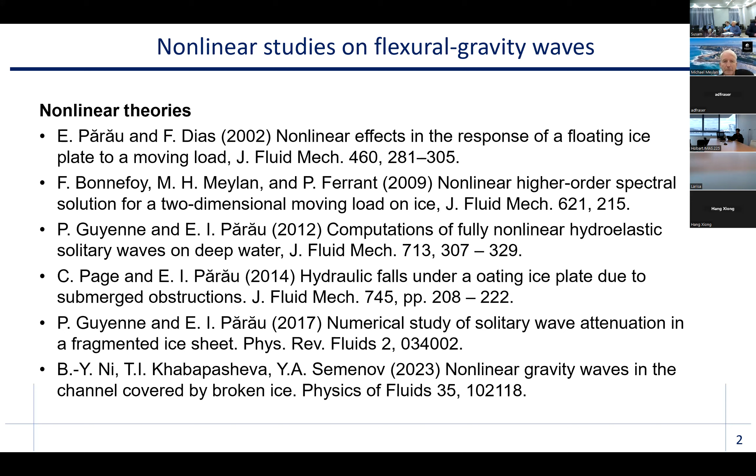The Bernoulli equation is written on the interface. Here, P ice is the pressure on the interface from the liquid, and it is equal to the pressure providing the balance of the elastic sheet. It will be shown later that there is a flow regime for which two waves of different wavelengths may exist. These waves may extend to infinity, but for computational purposes we need a uniform flow at infinity.

This can be provided by adding the damping term in the dynamic boundary condition. The coefficient CD equals 0 in the calculation region of interest, and it is not 0 in the damping region.

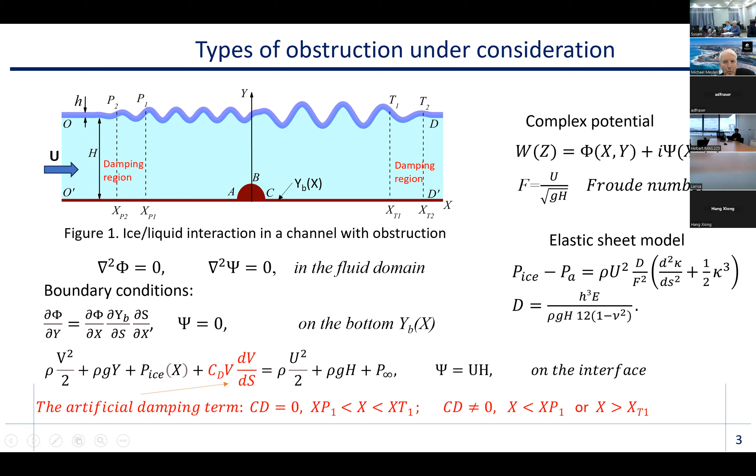We use the hodograph method to determine the complex potential of the flow. Determination of the complex potential W of Z is a difficult problem. Therefore, Joukovskii and Michell proposed to introduce an auxiliary parameter plane, or zeta plane. Then they proposed to search for two functions, complex potential and complex velocity, both as functions of the parameter variable zeta. If these functions are found, then by integration of their combination we can obtain the mapping function which relates the physical plane and the parameter plane.

In the present case, for the channel flow, the complex potential plane is quite simple. This is just a strip, and we can immediately find the conformal mapping of the first quadrant onto the strip. This is just the logarithm function, and its derivative can easily be found.

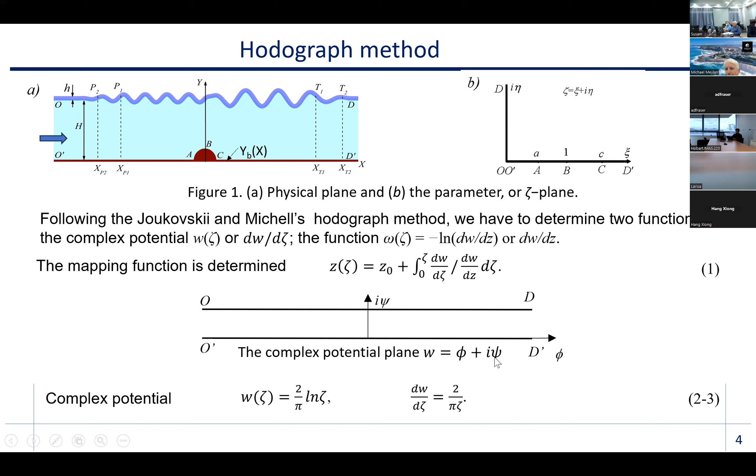To find the function of complex velocity is a more sophisticated problem. At this stage, we assume that we know the slope of the bottom, and we know the velocity magnitude on the interface. It means we know the velocity magnitude on the imaginary axis of the first quadrant and the slope argument of the complex velocity on the real axis of the first quadrant.

Then we apply an integral formula which solves this mixed boundary value problem. This formula immediately provides a complex function which satisfies the boundary conditions 4 and 5. What we need is to consider that the slope has corner points A and C, and we have to evaluate the integral at these points, and finally we can obtain the expression for the complex velocity in this form.

Then, as I mentioned, the combination of these two functions can provide the mapping function. However, this function has a logarithmic singularity. It means that if we use this formula, we have difficulties computing parameters in the channel far from the origin, at distances larger than 5 depths of the channel.

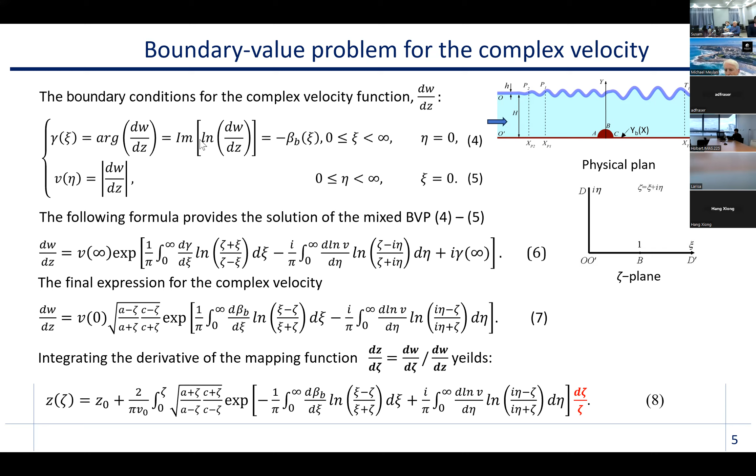To overcome this logarithmic singularity, we again come back to express the parameter variable zeta through the complex potential. And substituting this expression into the expression for the complex velocity, we obtain the complex velocity as a function of the complex potential. And finally, we obtain the derivative of the mapping function in the form 11.

So it looks like the Kirchhoff-Helmholtz solution, where they obtain the function dz also as a function of the complex potential. We can see this function has two unknown functions at this moment: the slope of the bottom as a function of the potential, and the velocity magnitude on the interface, also as a function of the potential.

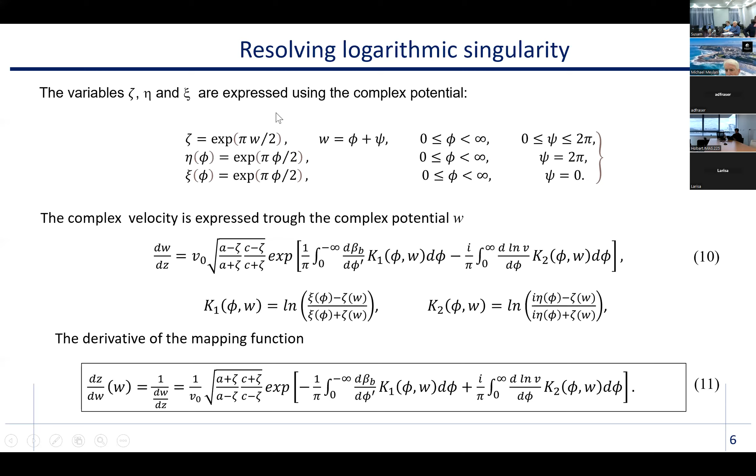So to determine these two functions, first we have to consider the shape of the bottom given by the slope beta of s, which is a known function, and using the derivative of the mapping function, we can find the function, where s is the spatial arc length coordinate along the bottom. So this leads to the integro-differential equation shown here. The function d beta d phi appears on both sides, and this equation can easily be solved using the method of successive approximation.

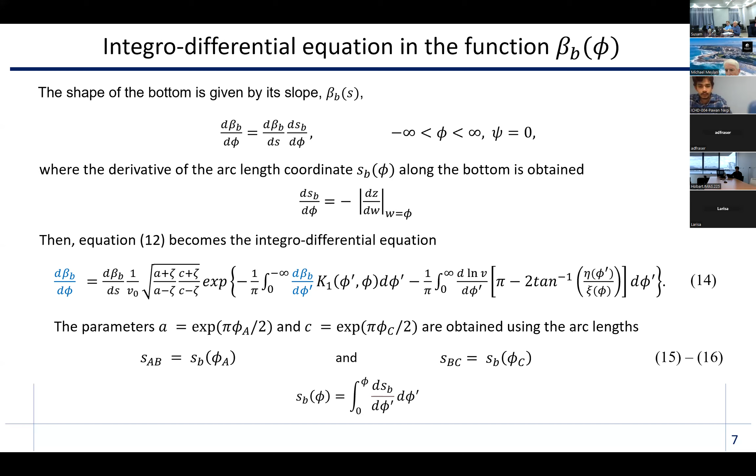Also, we have two equations to determine the position of points A and C. They can be found using again this function of s. To determine the function of the velocity magnitude on the interface is a difficult problem. If we proceed with analytical derivation, we arrive at a hypersingular integral equation, whose numerical solution is quite difficult. So we go another way.

We approximate the interface by a spline of order 5, which provides linear interpolation of the pressure between two nodes on the interface. So using the dynamic boundary condition, we reduce the problem to a system of nonlinear equations in the nodes of the spline interpolation.

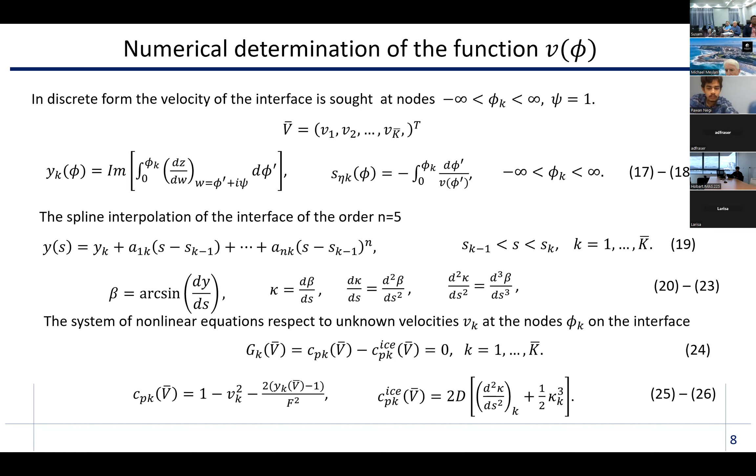Speaking is open. And you can continue. Okay.

In the second region there are two wave numbers in this equation, and we have two waves. The first root is closer to the case without the ice sheet, and we call the wave corresponding to this root the gravity wave. The second root is due to the elastic sheet, and we call it the elastic wave. And in the case of supercritical flow in the channel, this equation has one root, which is caused by the elastic sheet.

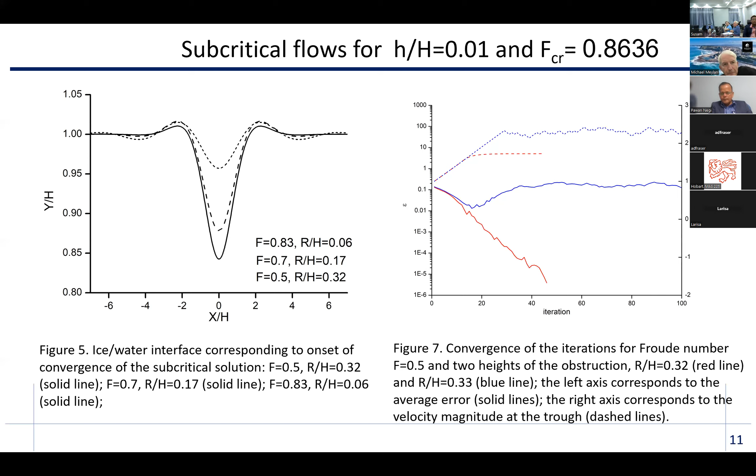Here two heights of obstruction: the red line 0.32 and the blue line 0.33, this is again maximum height of obstruction. The blue line corresponds to the maximum height of obstruction. The limitation now comes from the situation that the local Froude number at the trough of the wave, shown by the dashed line, becomes larger than the critical value 1. So at the trough, flow became supercritical, channel super. This is a limit, giving a limitation to get a convergent solution.

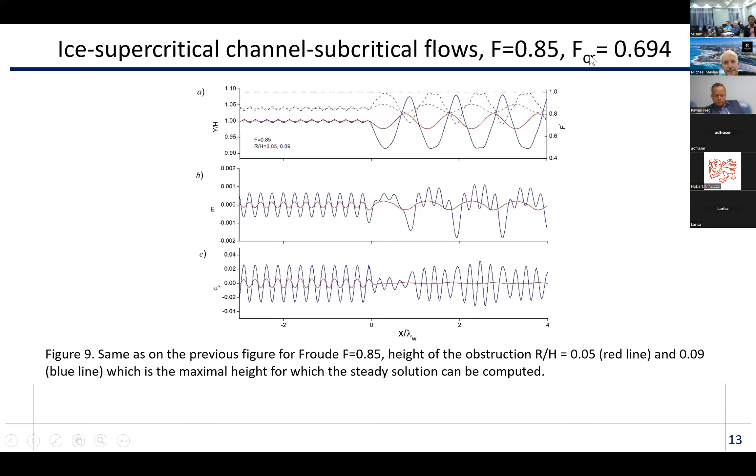Finally, when the Froude number approaches the critical Froude number, the wavelengths of the elastic sheet and gravity wave approach one another, and we have superposition of two waves of closely matching wavelength. This is well known from the theory of oscillation. It causes quite complicated behavior of the oscillation. Also, we can see that the elastic wave decays downstream of the obstacle, but decays more slowly as we approach the critical value.

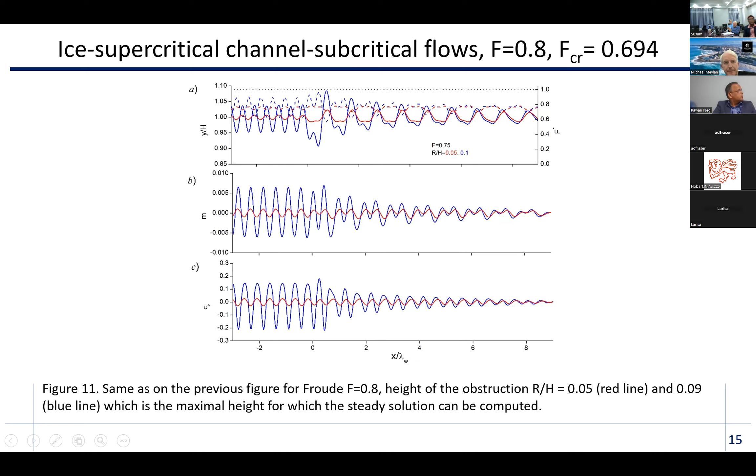So in this case, on the interface some local waves appear, which make it difficult to obtain a convergent solution. According to the dispersion relation, we should see some waves due to the elastic sheet here, but the amplitude is so small it's almost invisible. We can also see these waves in the behavior of the bending moment and pressure coefficient on the interface. As the Froude number increases, the amplitude of oscillation decreases.

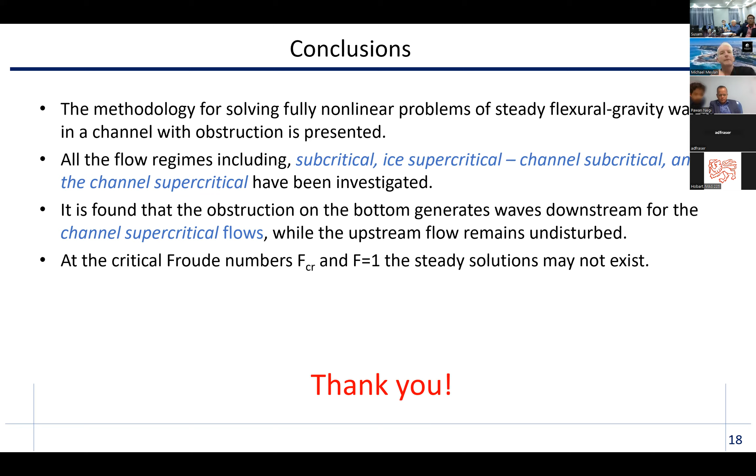So, do we have any questions for Yuriy? Someone will ask. And Pete, please feel free again to write your questions in the chat. I've got some questions myself, but I'm just hoping someone else gets a chance to ask.

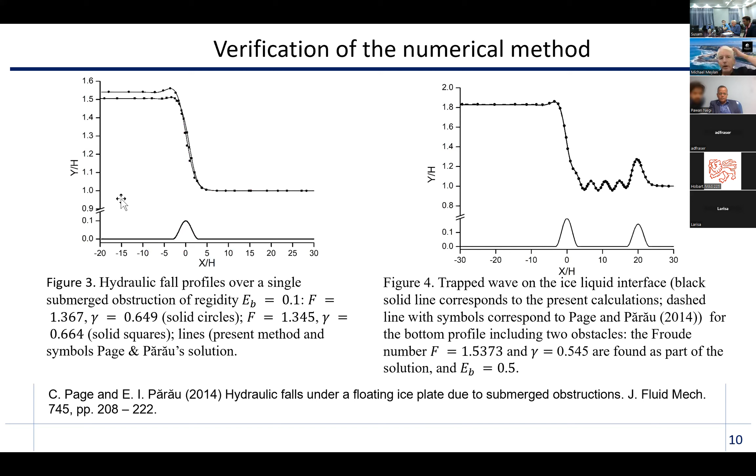Yuriy, what's the main challenge compared to the case without the ice? When this method was developed for the case with just a normal free surface, how does the ice make this more challenging? Maybe I'll write the question in the chat.

Yes, yes, it's completely true. In comparison with broken ice, we have higher order derivatives which appear in the dynamic boundary conditions, and it makes additional computational difficulties. So in case of broken ice, we have a third order derivative. In case of the continuous ice sheet, we have a fifth order derivative. And as the order is higher, for computation we need more nodes to interpolate correctly and precisely the interface. That is the main challenge.

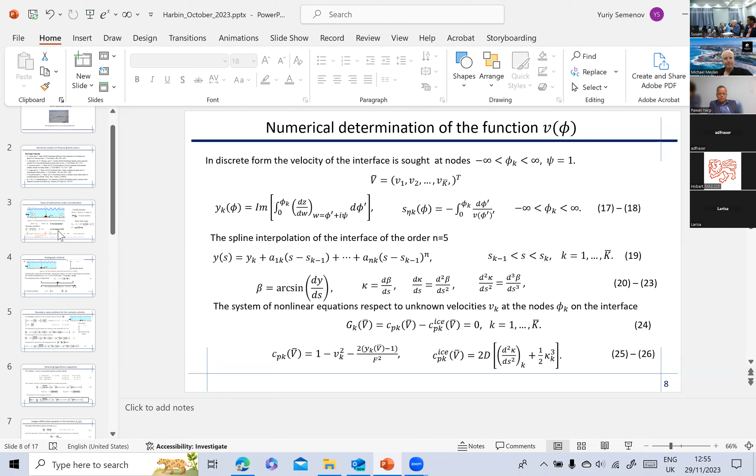But maybe I'll ask another quick, slightly related question: could you include the effect of compression in this? You know, this has become an interesting feature where with compression we get more wave modes appearing, or... I hope we can include the effect of compression within the dynamic boundary condition.

No, compression is actually kind of a steady flow, so the role of compression is not effective here. The results shown here are without compression. Yeah, but I think that without it you wouldn't have that supercritical behavior - you could get weird things happening with the modes, with that negative energy, you know. Yeah, it's just a thought.

No, sorry, I did not actually study the effect of compression. I cannot answer precisely with equations, but this method makes it possible to include this.

What about the problem of a step? You know, there's another transformation that flattens it. Do you know what I mean? The problem with a step that it goes like that. Yeah, in points A and C we have corner points. These corner points we evaluated in expression 7.

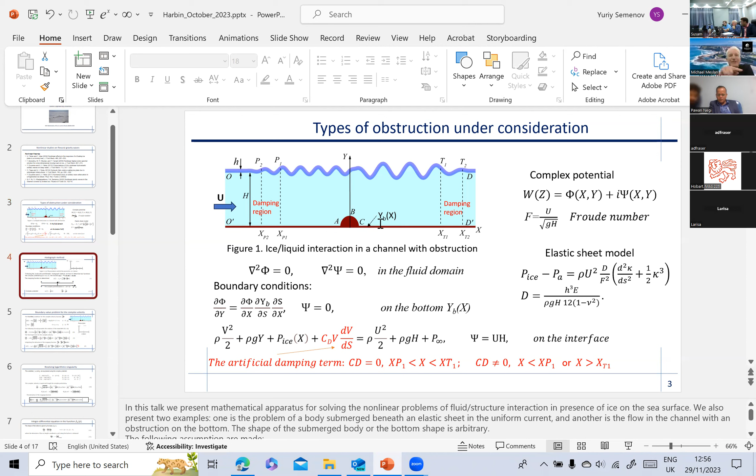This is the general formula for continuously changing slope, but in case of this step change, the corner point is a step change of slope. So we can easily evaluate this integral and obtain these terms for point A and point C. So this function is continuous without any steps - it's just along the circle, along this semicircle. It continues.

I'll take a risk and interrupt. I was thinking of the problem where the bottom goes like that. What bottom goes? You know, we have a change in depth. Change in depth, yes.

Yes, actually we can include any shape of the bottom. It's given by the function Y_b, and this is an arbitrary function, so we can investigate a step bottom. Only the problem is what we obtain at infinity. For example, if we have one step, just a step, then we have, in case without an ice sheet, a flow like a hydraulic fall, with ice also. So the condition is if flow upstream is subcritical, it will be downstream supercritical, and opposite. If supercritical upstream and the step is increasing, then we obtain...